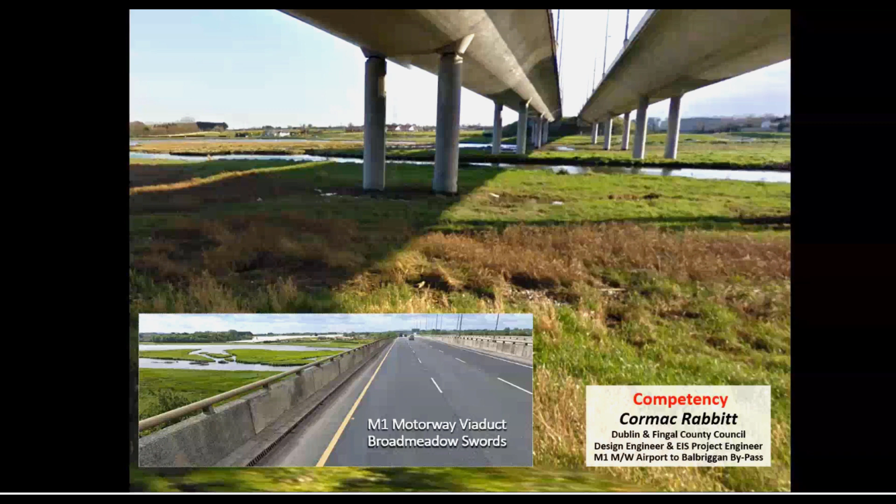I'll go to the next slide. The fundamental issue, as far as I can see, is the tranquility of the River Corrib—that's the environmental part—but also the impact on residential areas, and then how they link in with the national routes, maintaining the hierarchical aspect of that.

This is a question of the sum of the parts, or the total being greater than the individual parts. This is very much to the forefront, because if the hierarchical nature isn't maintained in roads, the investment in all our national routes is greatly diminished, because it cannot be utilized as intended.

Inspector, I would ask you maybe to stand beside that bridge for 5 minutes and listen to the noise. That river is not tranquil there at all, in any means or manner. It was totally tranquil, just as the area of the river at Menlo Castle and the sports grounds of NUIG are the same.

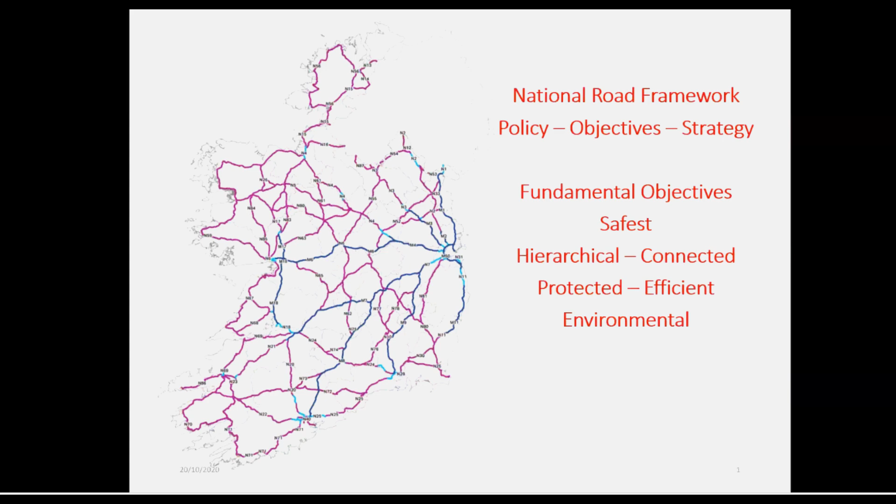So looking at Galway here to meet the objectives, I really feel that the proposal needs to be amended, and the amendment actually ties in very well with what's already been proposed. As a matter of fact, it builds out from it. It utilises what's there, the reservations, the CPOs, and so on, as you will see as I go on.

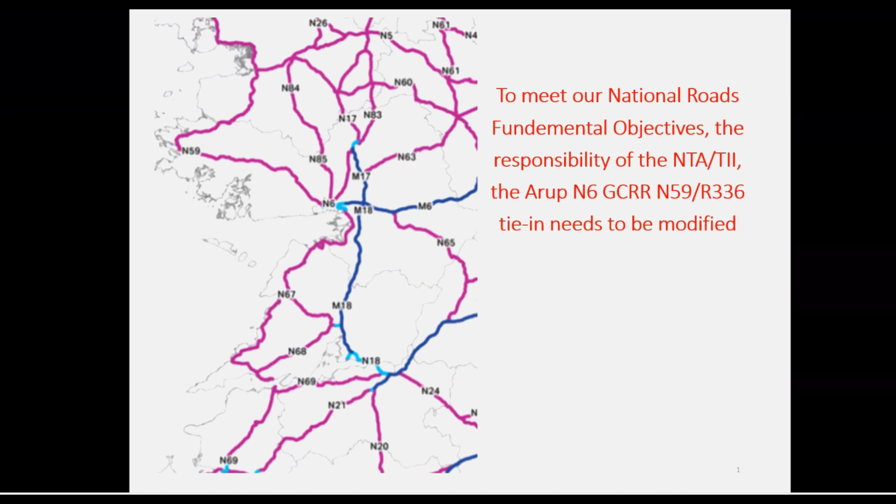Stephen summarised the road, the connection. I'll go into a bit more detail as to how the road will function in an overall field here. Basically, it's on the link at the R336, overall the green line, the green parts of the road. The green is the Arup proposal.

The amendment eliminates the green totally. It eliminates all the CPO on that part of the green, except where the dashed orange line is on top of it. So it eliminates the road between Letteragh and Dangan Road, which is quite a steep cut. So it eliminates a big cut through the mountain.

It utilises the cut already proposed just west of it, where the R336 is shown here. So the biggest difference is that it maintains the hierarchy, joining the N59 directly with the N6. It shortens that journey by a whopping 1.8 kilometres. It does not prejudice in any means or manner the aspiration of the Galway City Development Plan to have a distributor road, because that links back to Aughnacurra.

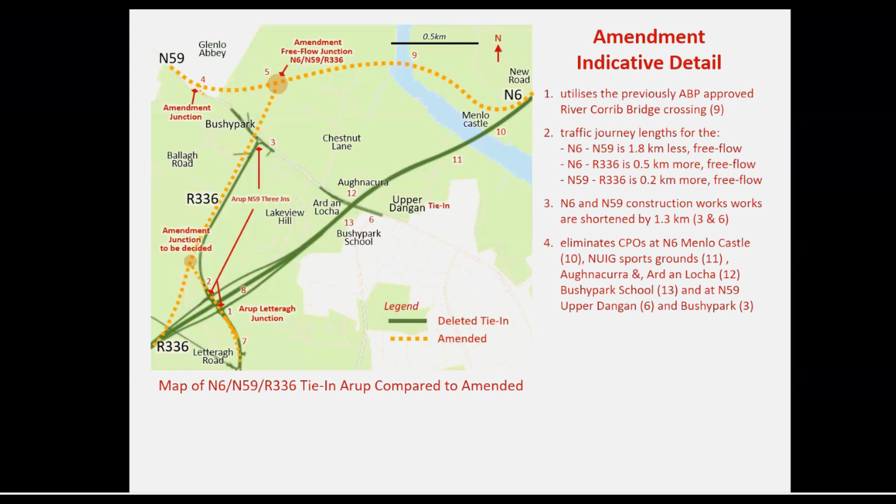It takes the road out of the controversial areas of the Menlo Castle, of the sports grounds, the hockey grounds, Aughnacurra, Ard an Locha. The Dangan Road has a big overbridge on it, and it takes that junction at Letteragh, which can be maintained, but totally simplified, because the traffic on it would only be a fraction of what it would be in the current situation.

Again, the routes, the junctions are rationalized. Junctions 1, 2 and 3 are replaced by a single junction at 4. Junctions 1 and 2 are at the Letteragh junction. Junction 3 is at Bushypark, and junction 4 is at Glenlo.

So this is the summary that Stephen has already gone over. Just before I come to that slide, I'll take this one first, to take the detail of the route and just how well it fits in with the environment.

I've never seen a scheme that fitted better into the environment, and I've done a lot of schemes, motorway schemes around the country, and bypasses I was involved in relocating, or designing and optimizing them. I've never seen something that was optimized so well with so little on it.

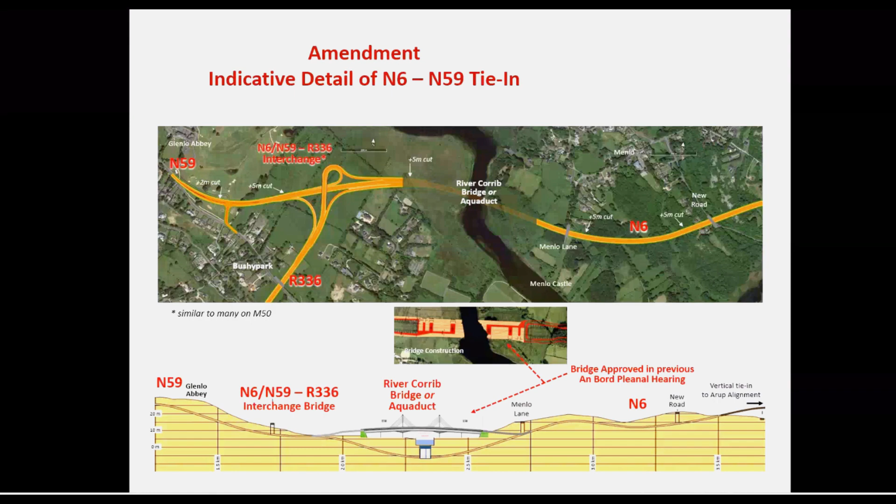I've shown 5 metres of cut here, it's actually 5 in one spot. So taking the road then that goes back to Letteragh, what's different here is that we're continuing down the slope that Arup has proposed. They've come quite steep down the hill, and then they just level off at the last minute to join that road, just continuing that road down.

So you'd be 7 metres in front of Bushypark House, moving down, and it then breaks surface. The bridge is over there because you need the maximum height to lift the road that joins as it comes up the steep hill to minimise the curves. So it utilises the ground to help as much as possible.

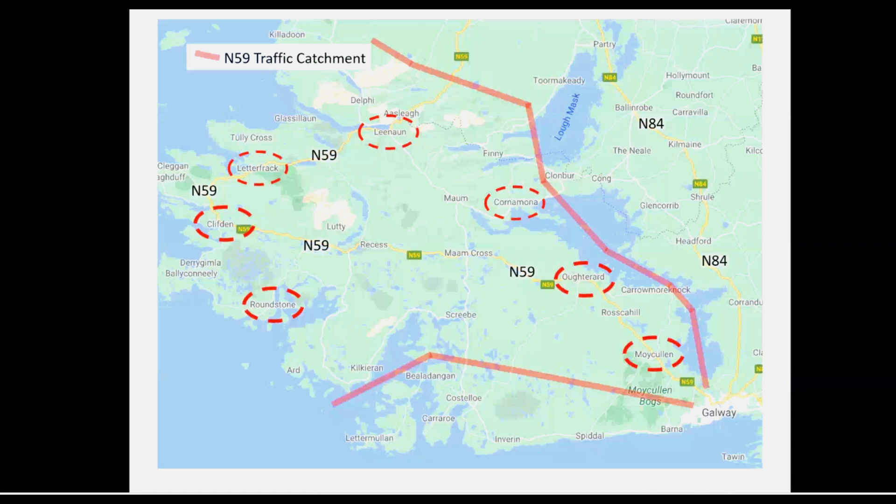I've shown you previously that the traffic that would want to come into the city from the other routes, cutting across at the top - just go back here - you can see how blocked the Headford Road, the N84, is. So there aren't really options for people to come in. They really only have what the N59 offers, but there are roads across the gap there that link those in, so it just utilises what we have better if you have a proper hierarchical connection.

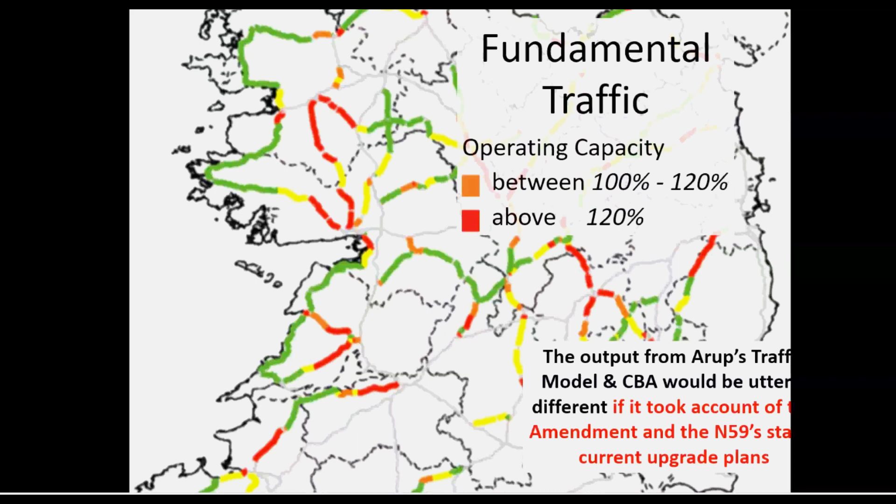The question was put to me that if we went with this, going back to the Bushypark junction, if we put the junction here, there's going to be about 700 vehicles turning onto this road, and we'd never be able to manage it because so much traffic is going into the city centre. But that traffic going into the city centre really just serves the hospital and the university, and that's not going to change too much over the years, but everything else will change because they've grown out in that aspect.

Also, that junction has a lot of turning movements. But if you take the junction at Glenlo Abbey and go to the junction proposed here at the church, there are actually more turning movements at that junction, to say it properly.

At point 3 there, you can see the green line coming down - there's more traffic coming down that road. When you add those turning movements in, it's just slightly greater, about 10%. You actually have 9% more turning movements than at Glenlo in the amendment. But the turning movements at 3 are much worse because there are three separate large movements.

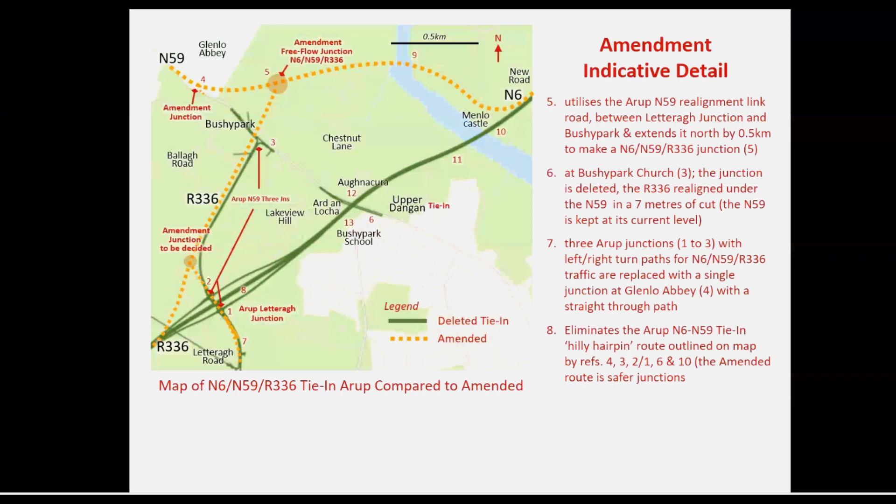Also, as I mentioned earlier, in this amendment there's the upgrading of the road between Glenlo Abbey for 800 metres to the northwest. That road can be brought in separately, linking in, so you can keep the existing road network as it is, with the next three junctions linked into this local road network.

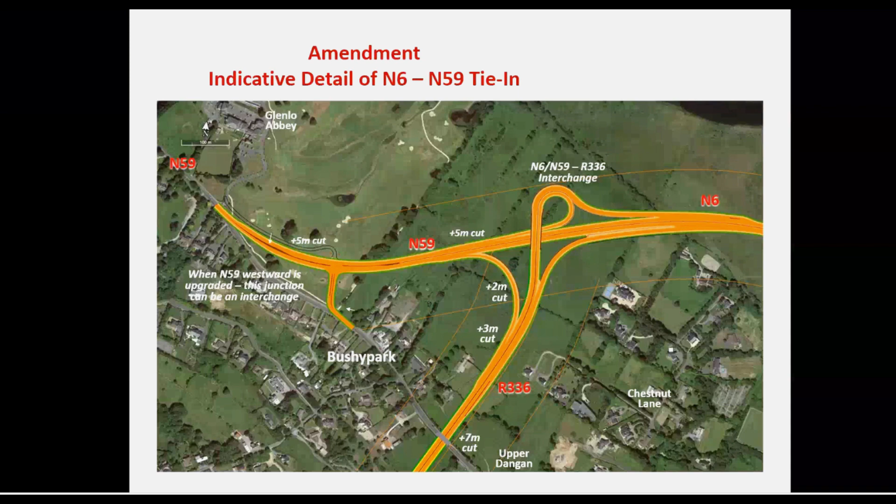One thing that's also missing is that there are a lot of crossroads between Barna and Aughnacura onto the N59, which are used, explaining a lot of the traffic in the early morning. Those roads will not need to be used in the same way with the amendment.

So coming to that, it shows the traffic, and that's just purely using the figures that were provided.

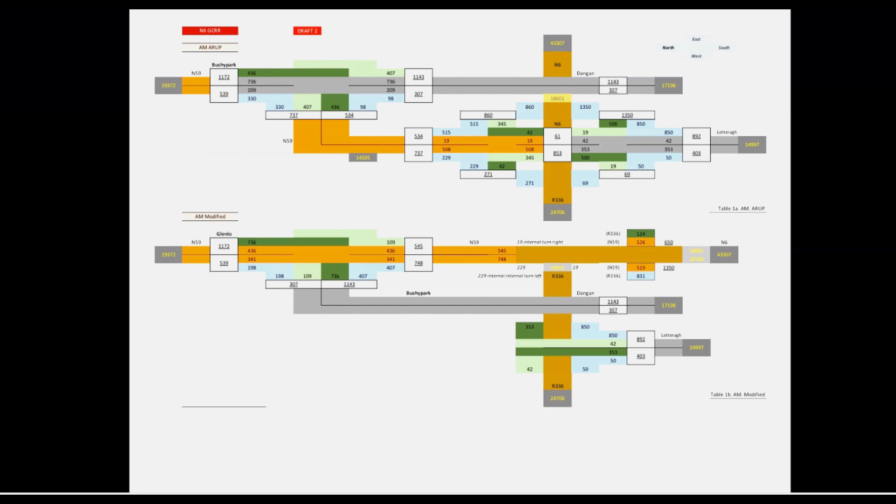Now, one critical point here is the traffic model, because I've mentioned the hairpin bend on the road. This hairpin bend adds 1.8 kilometers to the traffic movement, and that's difficult because you've got three junctions on it, and it's not free flow. You do that to any single road in a model and it totally changes the whole way it'll flow.

If you put one carriageway each direction on a road, it'll attract so much traffic. If you put two or three carriageways on it, it'll attract that amount of extra traffic - they just fill up. So having a hairpin bend like that, I'll give you an example.

The Westlink Bridge had a toll on it, and when they put the toll on, they found no traffic used it. They cut it in half and still found the same, so they had to reduce it a lot less so their model would actually produce traffic on it. It is very, very sensitive.

So what I'm saying is that the traffic model tells you very, very little, and I don't know of any traffic model that's ever been right. I can hardly tell you what I'm doing next week, never mind a fortnight's time.

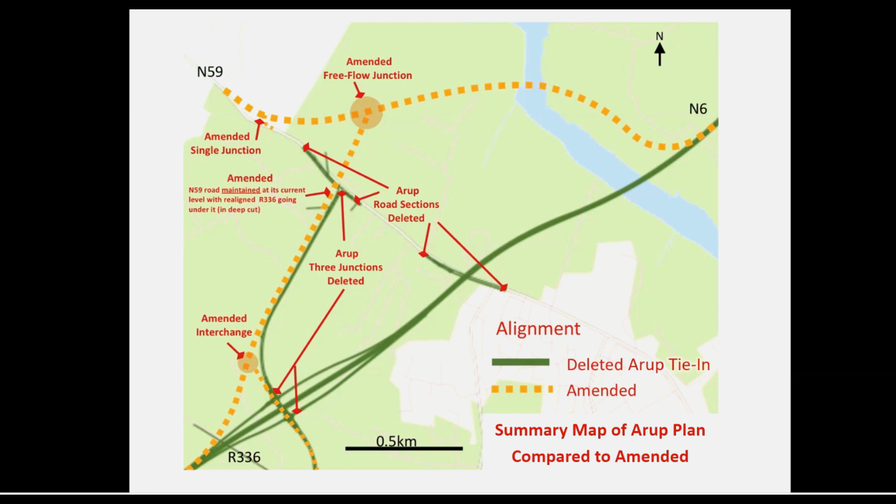Taking this a step forward, this diagram here just shows you the differences, just to simplify it. This 1c.4 is the same diagram really. This is just the next rows of the table above it, and it shows a 9% reduction. But everywhere else, you can see the percentage differences are mega, even without a bridge at Glenlo.

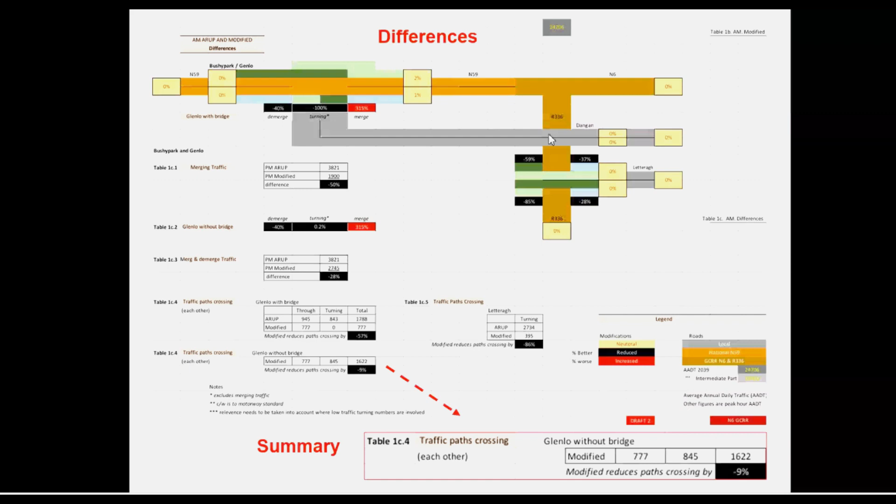And what a fantastic heritage centre, because it has the heritage of the writers of Ireland who used to visit there, the great writers, because all those families used to exchange with one another - all the famous writers, from Hearn who wrote the past of Japan, to all the other great writers recognised worldwide.

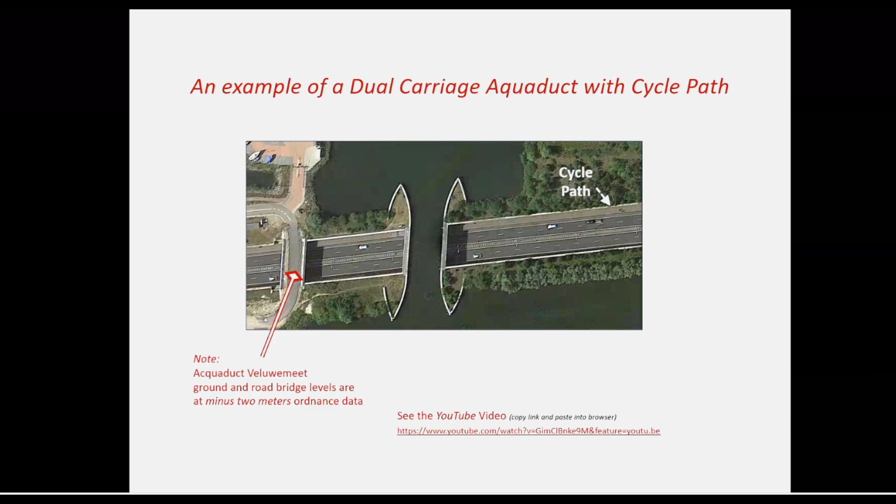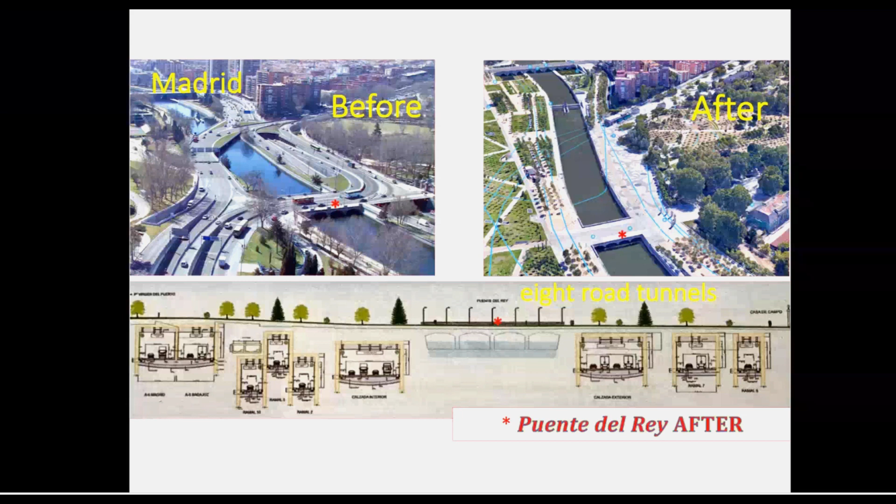I've walked the metro routes with the Japanese in Dublin, and I've walked the metro routes in Dublin with the men who built the Spanish metros. This type of thing is absolutely doable - we put a bridge under the river, it's absolutely doable.

On the amendment, they would be on the east side of Menlo Castle - they just go through a flat alignment past Glenlo and out. That would save a huge amount of time.

So I think that kind of summarises that we need a functioning national route to be connected hierarchically correct. And I think that the objectives that have been stated, what we're to achieve in regards of safety, accessibility, and so on, are well founded and should be respected.